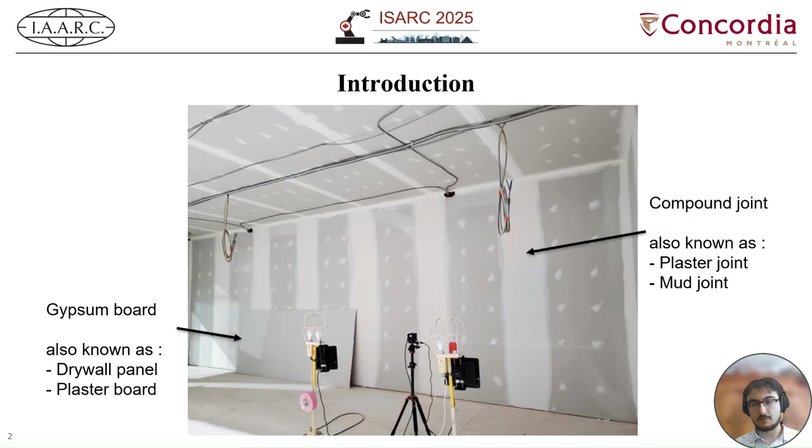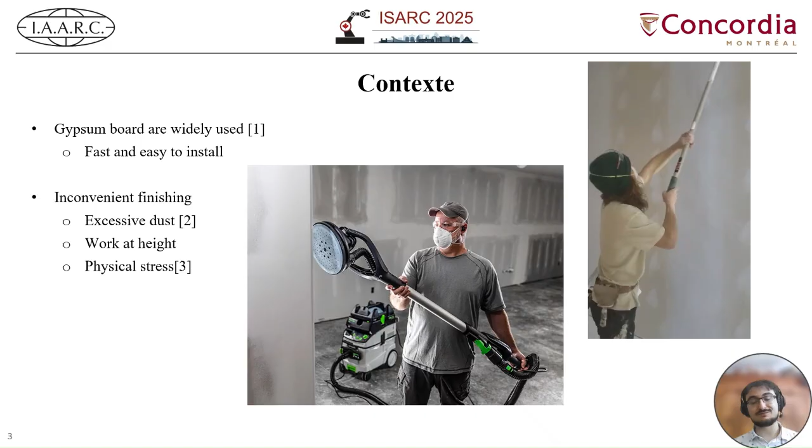So gypsum boards are widely used because they're fast and easy to install. The problem is that once the compound dried, you need to finish it with either power tools or manual tools. And this is very inconvenient for workers because it produces a lot of dust. You need to work at height for certain walls, and there's a lot of physical stress, mostly on the wrist, but also on the shoulders when you need to work with your arms over them. So sanding drywall is very inconvenient.

Even though drywall finishing is quite inconvenient, it's absolutely necessary to do. It makes sure that the compound is flat and that you cannot see the seams under the paint. It also smooths the compound and removes drying anomalies. So when the compound loses moisture during drying, it's gonna shrink a bit, and this causes a lot of problems like creases, bumps, and cracks.

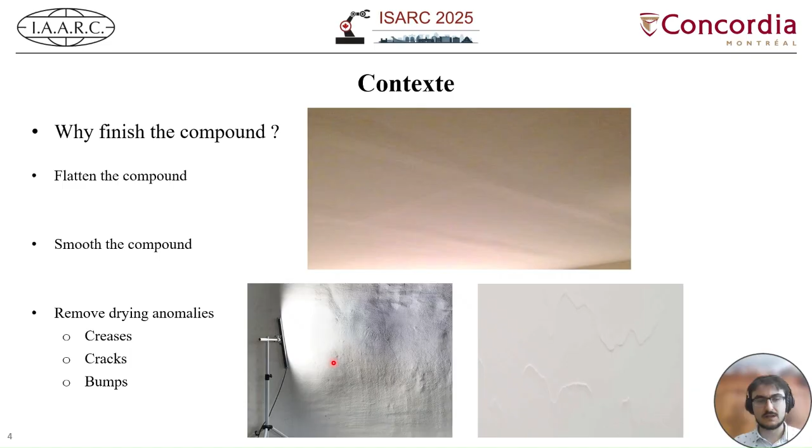So, our broad objective was to design a robot that can finish the compound and help workers with this task. So we chose to use a collaborative robot arm with the same orbital sander used by workers, placed on a mobile platform and a vertical axis to place the robot in front of the compound and use the robot arm to sand. And our specific objective for this paper was to determine if the robot finishes were equivalent to human finishes.

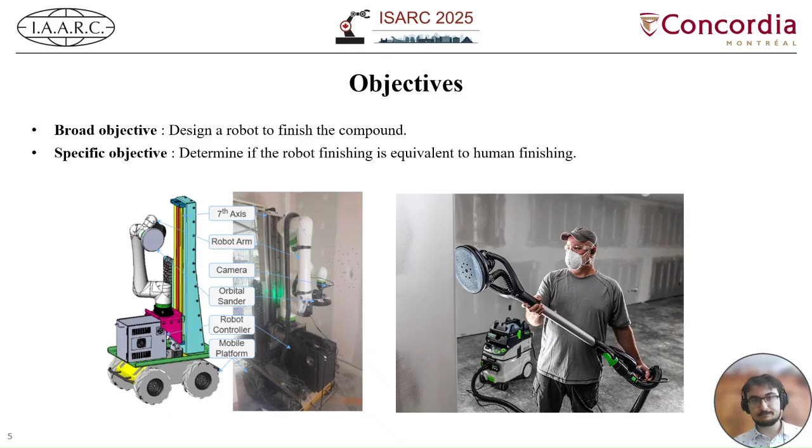So to quickly explain how the robot works, we first need to talk about the perception module. We'd like to see where the compound is in relation to the robot. So we use an RGB camera with stereo depth in addition to UV floodlights. We can use the UV floodlights to highlight the thin layer of paper on the gypsum board. This lets us do segmentation and contours to find where in the image the compound is. And since we also have a stereo depth module, we have a point cloud with 3D coordinates that we associate with that image.

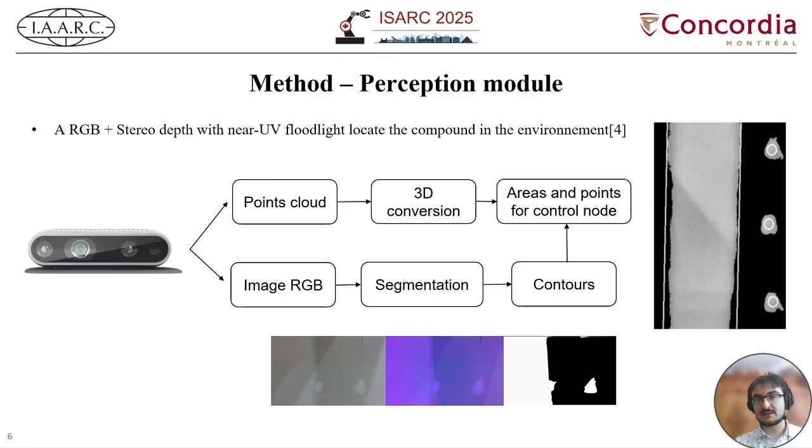So with the point cloud and the contours associated with them, it's quite easy to control the robot. We first need a zigzag trajectory to cover all of the compound in the image. And we transform those trajectory points from the camera frame to the robot frame. We calculate the inverse kinematics and send those joint positions to the robot via a TCP server socket with ROS-Industrial. And with the FANUC force control, we can control the contact force on the wall to make sure that the orbital sander applies the same pressure so that the finish is even.

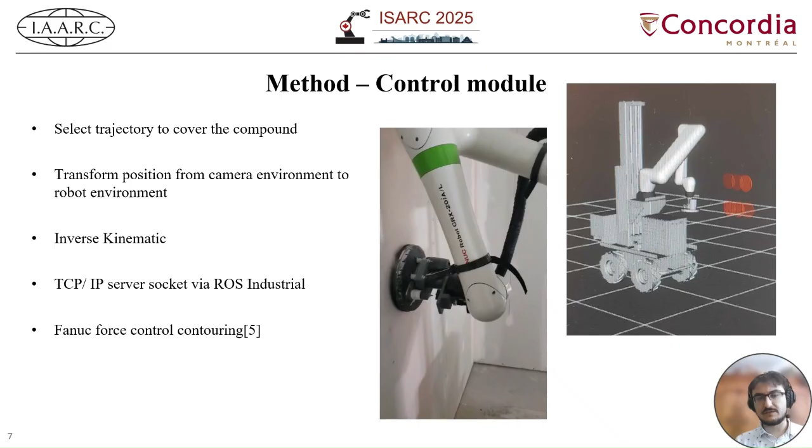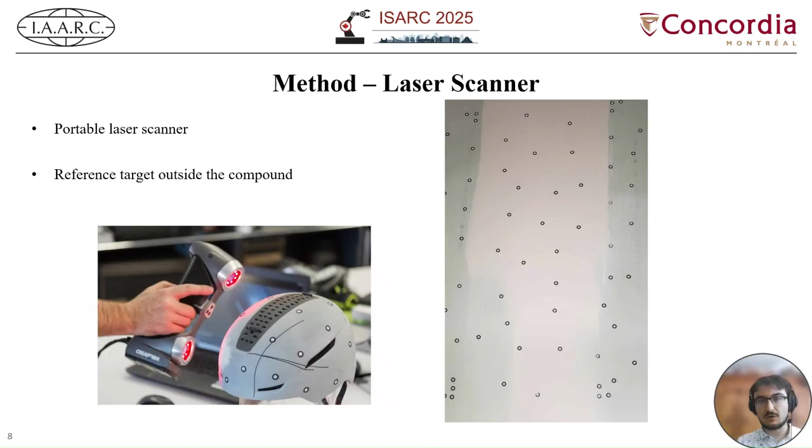To measure the compound before and after the robot finish, we use a portable laser scanner. This one from Creaform uses reference targets to make sure that we have a precise and repeatable scan of the wall. With the point cloud from the scanner, we can reorient it in the standard camera frame from the perspective of workers working on the wall. So Z toward the wall, X to the right, Y to the floor.

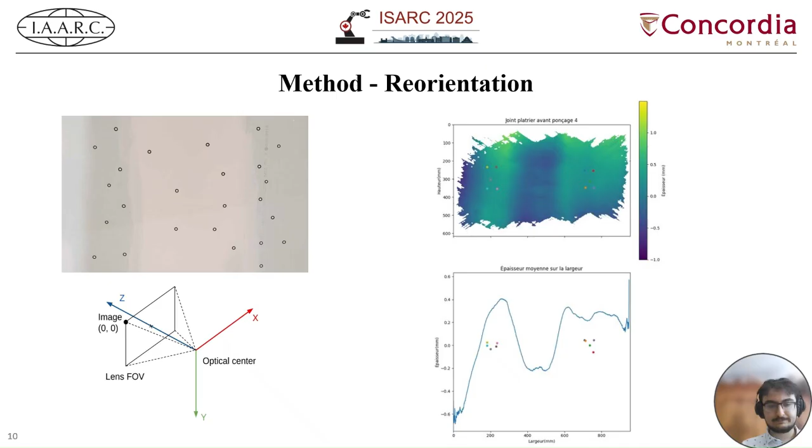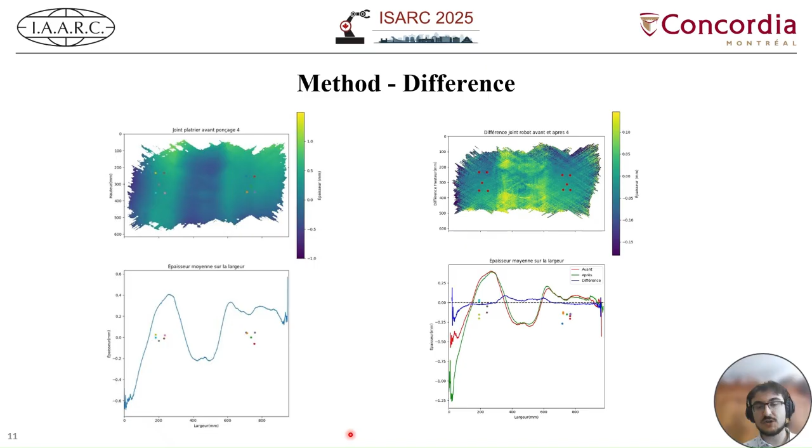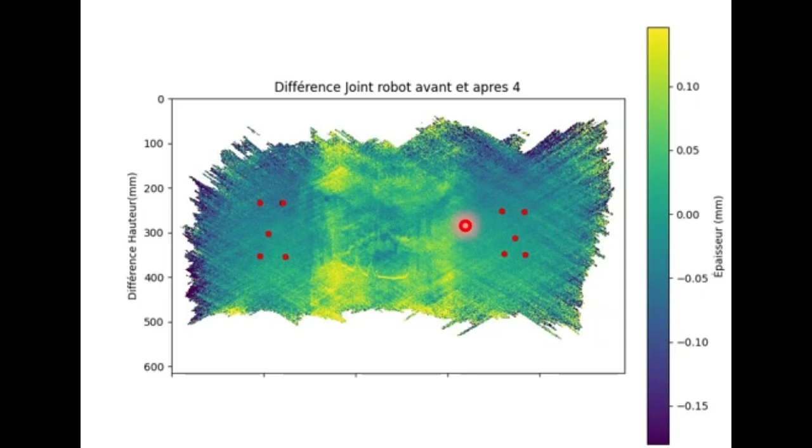The important part of the scanning is now to see the difference of before and after the finish. To do so, we reuse the targets that were outside of the compound to realign the scans on top of each other. So we can now take the difference in depth to create a new map of where there's more difference between. So we can see in the middle in Z positive where most of the material was removed.

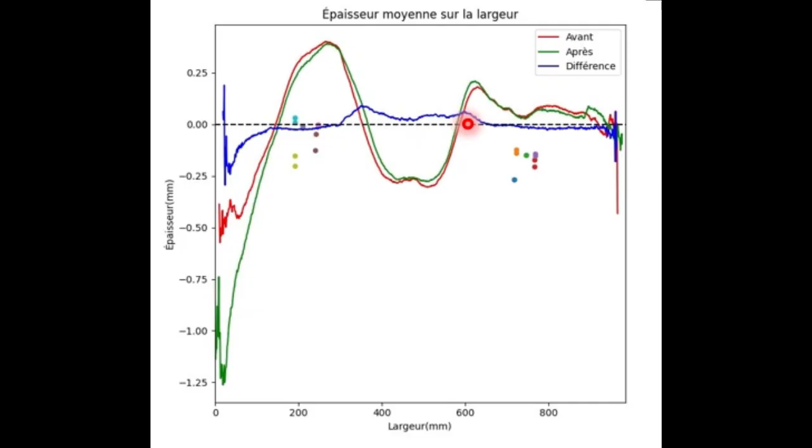We can also take the average of y across x to see first the red line that was before and the green line that was after, and the blue line that is the difference, so where we removed more material. This is also quite fun because we can see there was a crease that was removed with this method.

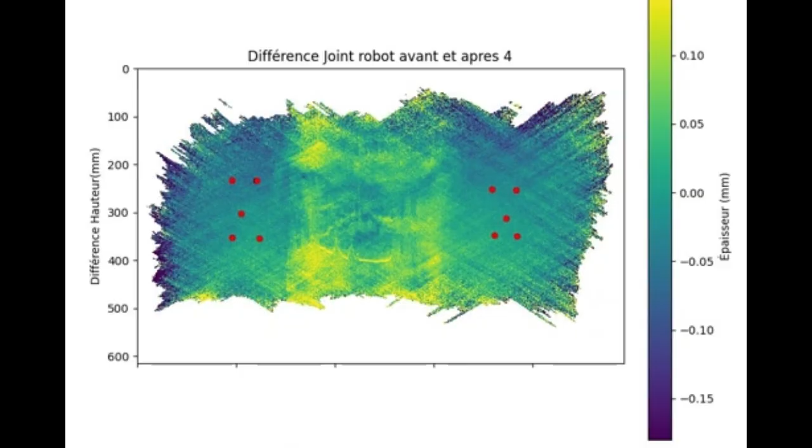Now that we have the depth of material removed, we can compare the workers to the robots. First, let's see our workers. So we take for each of the different joints that we measured the depth of material removed, and we can see the average depth, the standard deviation of depth, and the 95th percentile of depth removed. This is useful because we don't want to pierce the compound. And we can see that on average, workers removed about 0.09 millimeter with a standard deviation of 0.05.

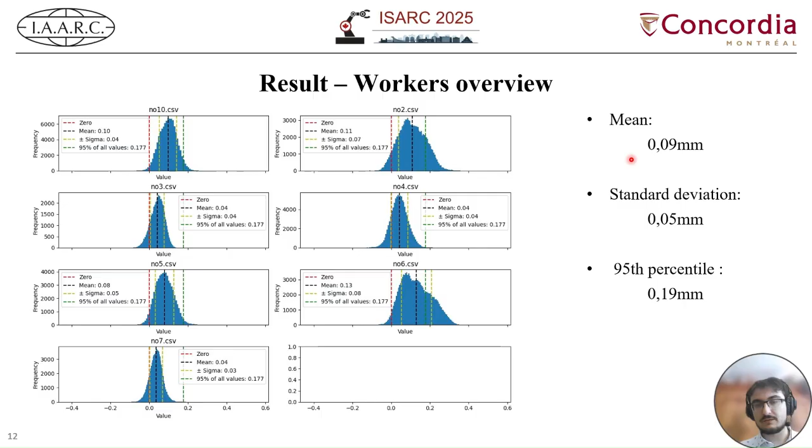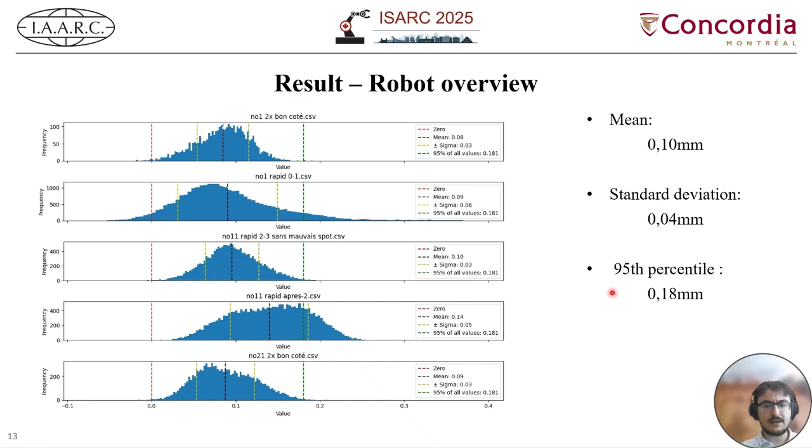So if we compare that to the robot, we see that the robot had an average of 0.1 millimeter of material removed and a standard deviation of 0.04 millimeter removed, and also a 95th percentile that is lower than the workers. So at a quick glance, the robot seemed quite similar to the workers.

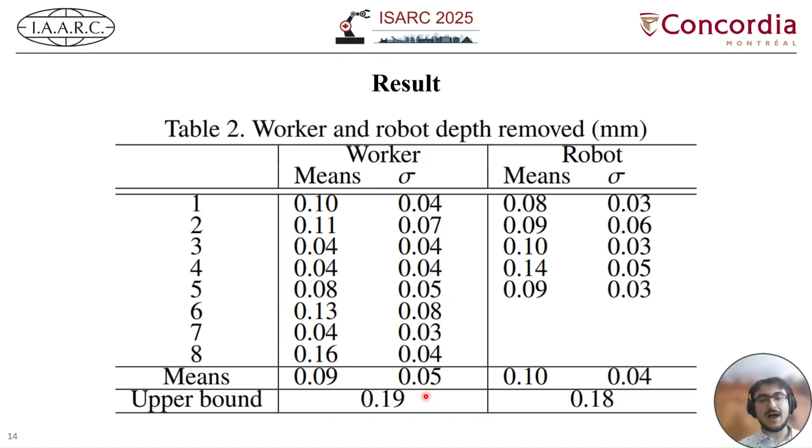So if we make a quick comparison between the robot and the worker, we can see that they have about 0.01 millimeter difference on their average and their standard deviation, and also for the 95th percentile. So this is quite a good result, but we can ask ourselves, well, how actually similar are the two of them?

To make sure that the robot is similar to the workers, we can do a statistical difference test. So with a t-test, we found that there was no statistical difference between the two sample groups, but this could happen because we had quite a low number of samples. So if instead we do a power test, or should I say an inverted power test, if we assume a power of 80%, we could have detected a difference of 0.054 millimeter.

This is quite interesting because the workers' standard deviation is 0.05. So in other words, if there was a difference between the robot and the worker, that difference would be smaller than the worker's own standard deviation. So this is quite a reassuring result.

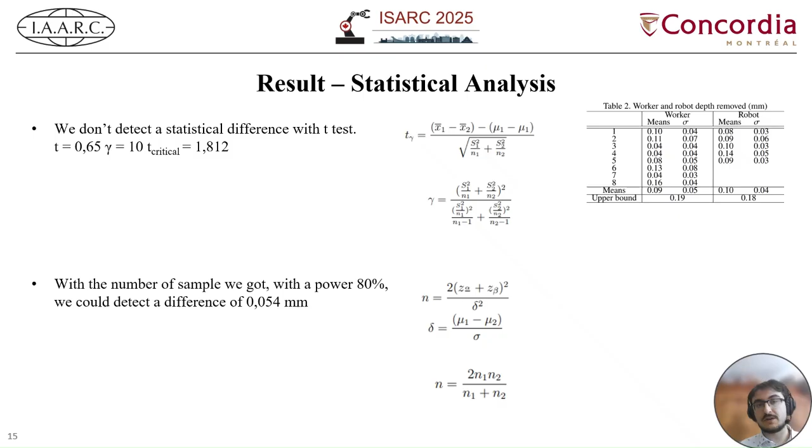Conclusion: our main findings showed that the robot removed ridges, bumps, and cracks, isn't likely to pierce the compound, and removes about the same amount of compound compared to workers. So using a collaborative robot to sand drywall is a promising technology.